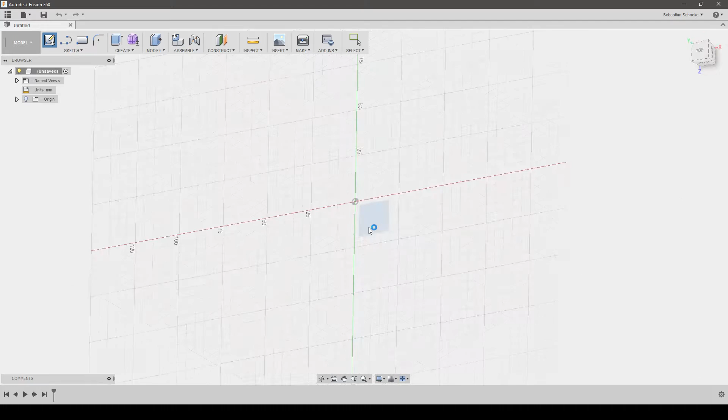Let's jump into Fusion 360 here, and we go, give me a sketch on here, give me a center point rectangle, and I'm going to say make it 60 millimeters by 115 millimeters. And there is the outer dimensions of our model.

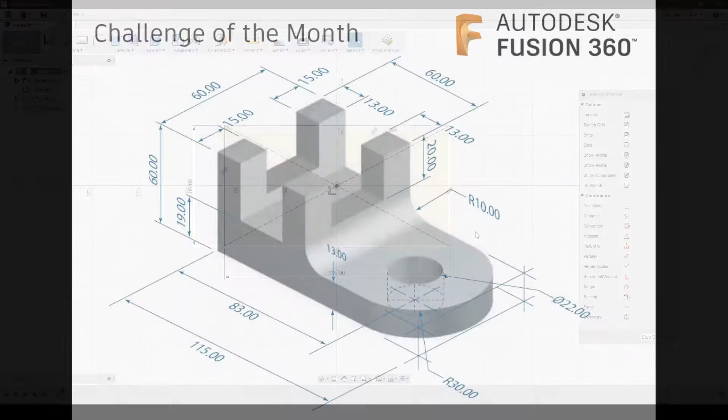We go and look back at our drawing, we'll see that it has a 30 radius rounding at the front. So let's go back and do that. There's more than one way to do this. You could use a sketch fillet, etc. I am going to use an arc.

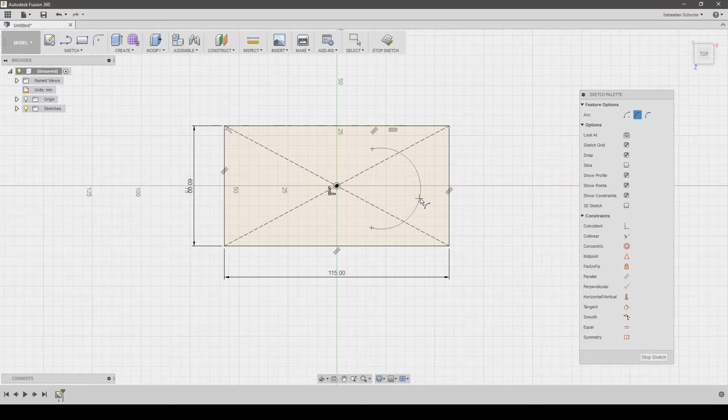So I am going to very simply say I want to create a 3-point arc, start point, end point, created something like this, and then I'm going to use constraints to get our arc to do what we want it to do. First things first, I'm going to tell this edge to be tangent on here, tell this one to be tangent on there, and I'm going to tell this one to be tangent there.

And then lastly, I'm going to tell this point that you have to be on this line, and this point on that line, and there we have our rounding. You could put in a dimension on this just to prove it for yourself, but it will tell you that putting in a dimension will over constrain the sketch, but it is radius 30.

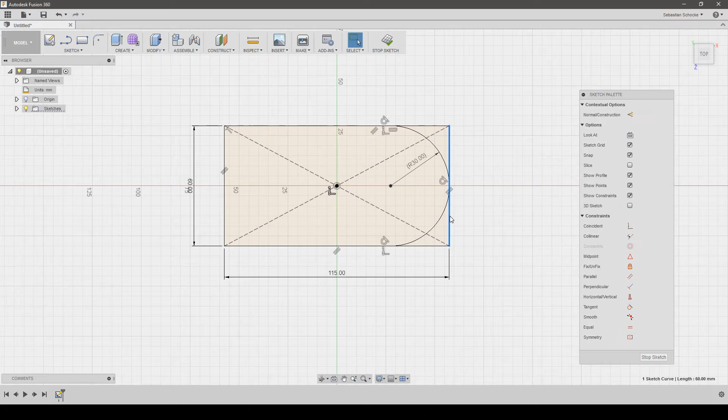Now we don't need these lines anymore, especially this one. So I'm going to convert that into a construction line. Then I'm going to break that line over there and that line over there into more than one piece. And I'm going to convert these into construction lines as well. And there's the basic shape of our design.

Going back to the drawing, there's a 22 diameter hole in front, center diameter circle, 22 millimeters, and the dimension given to us on the sketch is that it is 83 millimeters from the back.

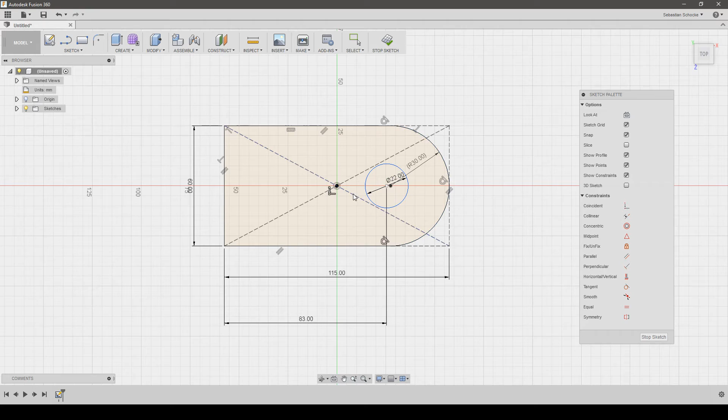As you can see, it is not 100% the same space as where your rounding in the front starts, even though on the sketch it looks like that. The point here being is use your dimensions to draw your sketches. Don't make any assumptions about locations.

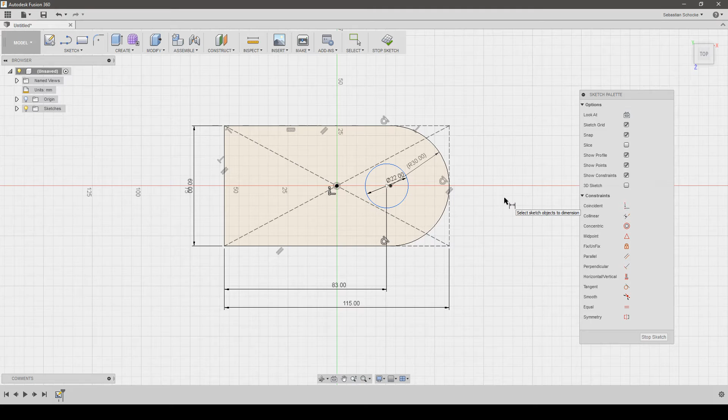Finally, that circle is not fully constrained because it does not know on what level it needs to be. Let's fix that. At this point in time, because our circle is not based on exactly being on a center line, to enable that we need to create a center line through our sketch. This is very simple.

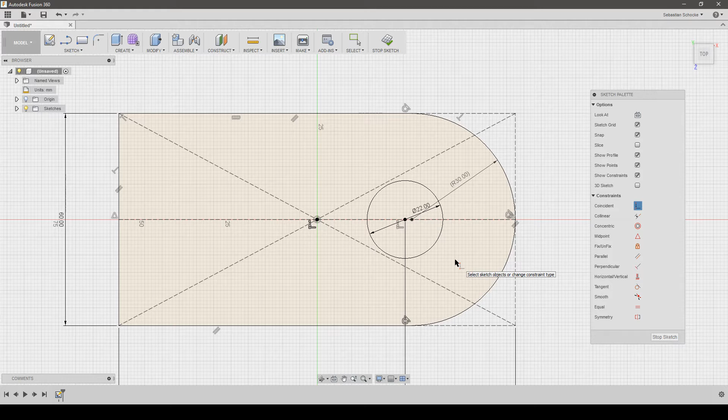You grab your line there, see the little triangle that defines the midpoint. Grab this line, make it a construction line, and now we can say that this point of the circle needs to be coincident with there, and now we have a fully constrained point.

Next up, a fully constrained circle. Next up, we look at our drawing again, and we see these little blocks and spikes that we need to create at the back. Very first thing I'm going to do is create the line on the rightmost section, which was given to us as being 13 millimeters away from the back.

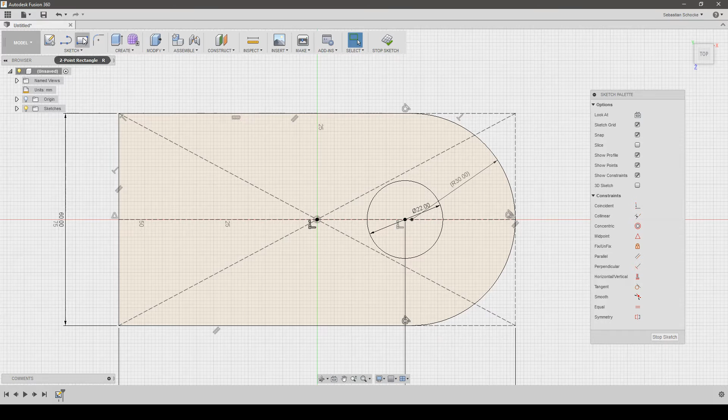So let's go there. I am going to create a rectangle, 2-point rectangle. Say create it over here somewhere, just make sure that it's on the lines. Now we can dimension this and this to say it should be 13 millimeters thick, and we can create a dimension between this and this to say this should be 60 millimeters.

We also need to create another one of these rectangles, there, there, and it also needs to be 13 millimeters, and there are those two rectangles. Next up, if we look at our sketch, is these little bits that stick up. We can see they should be 15 millimeters wide each.

Let's go back to our sketch, to our Fusion, and once again use our center point, our 2-point rectangle. We're going to create these over here and say this should be 15 millimeters. And then continue with the 2-point rectangle, create another one here, create another one, create another one over here, create another one over here.

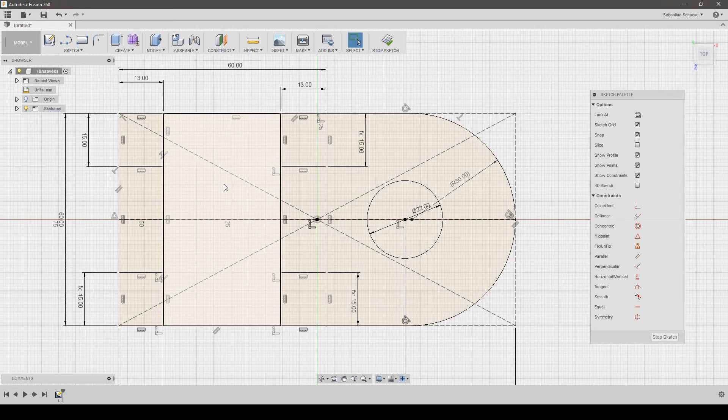Although it seems we have some other problem here. It does not seem to be fully constrained. That line, for some reason, did not decide to apply its constraint collinear to that line. Okay, and there we have all the basic requirements for the shape of our model when looked at from the top.

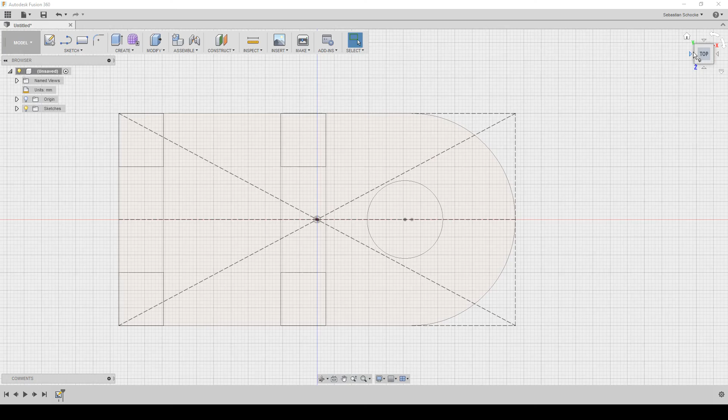And let's start and say this whole thing at the front should be 13 millimeters high, and then the hole needs to go through it. Stop sketch, get in 3D mode and say extrude this by 13 millimeters, and should be fine. Better turn your sketch back on.

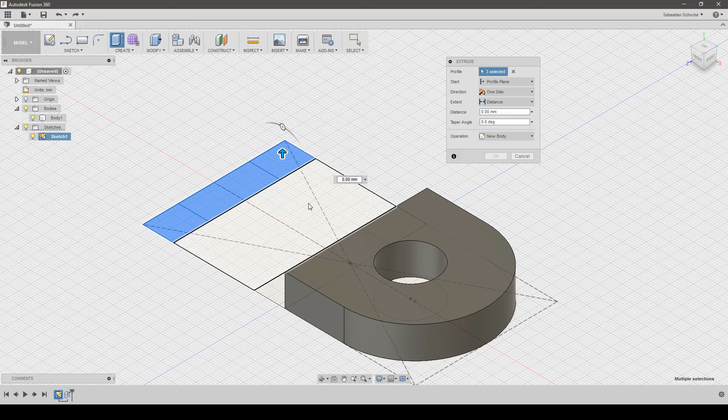If we have a look from this point, we need to extrude that entire back end by 19 millimeters. So let's go ahead and do that and say extrude. And now we are going to grab this, this, this, this, this, this, and this. And we say extrude it by 19 millimeters. Make sure your operation is join and OK.

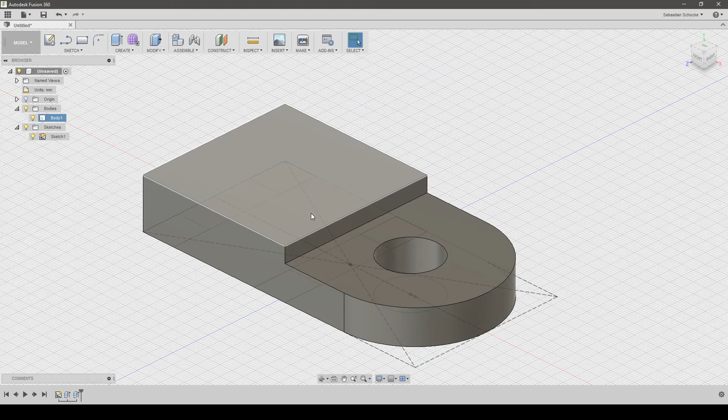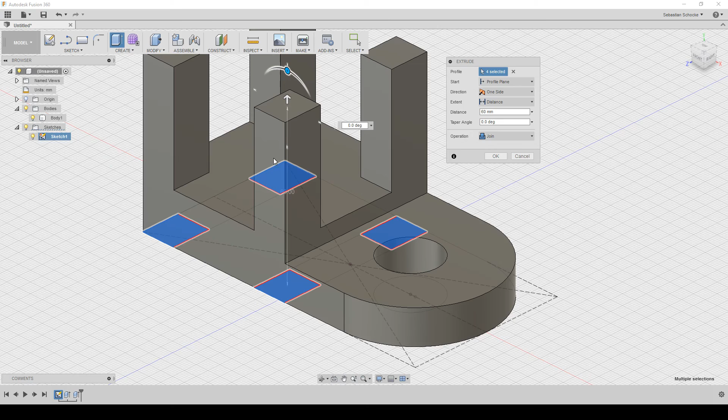Next up from our model is the pins at the top. It will be the easiest to do because they are given to us as being 60 millimeters from the bottom. So let's go ahead and do that. Extrude, and to make this a bit simpler, you can turn off this body for now. Select 4 pins, turn your body back on, and now we say this needs to be 60 millimeters up. Operation should be join, and looks about right.

And then finally we need to do the pieces in between there. And those are going to be extruded to be 20 millimeters down from a total of 60 millimeters. So they need to be a total of 40 millimeters up. Let's go back.

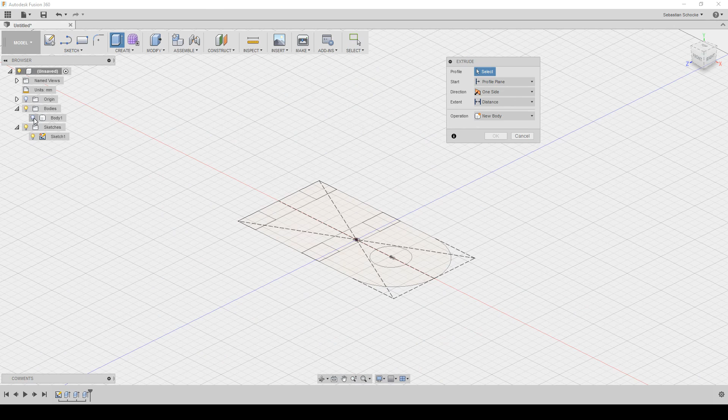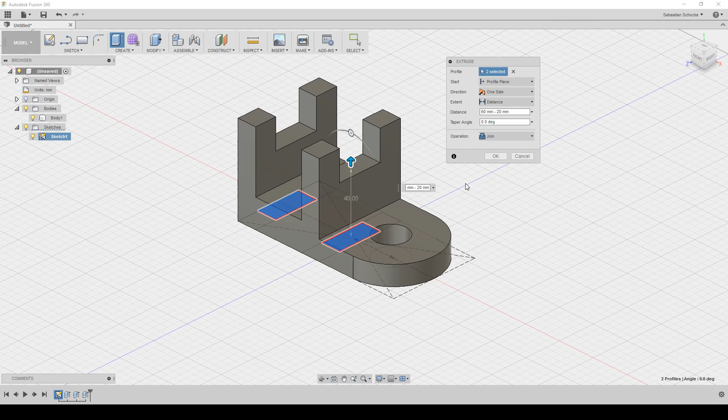Extrude, switch off our body, select that part over there and that part over there, our body on again, and as we said, it is 60 minus 20. Operation is join, and you should see something similar to that. And that is the basic shape that we are going for.

All done. Now all that we have to do is our 10 radius fillet, and we can do that easily by hitting fillet, this line, and putting in a radius of 10 millimeters. Okay, switch off the sketch, and there is our completed model.